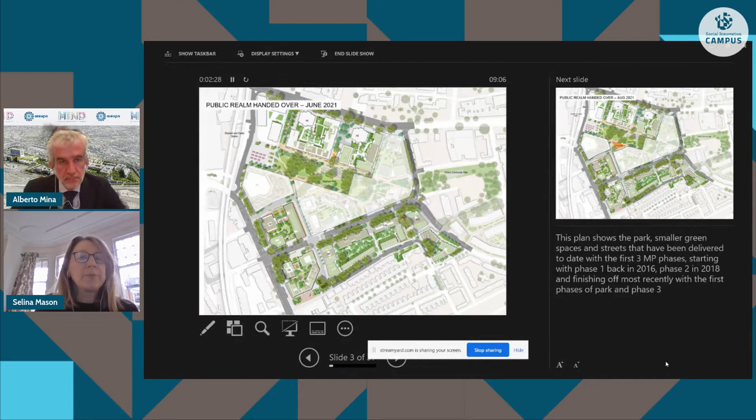We'll be finished completely. 50% of the master plan is landscape, and that was an important part of the deal with the local authority. It was very important to them that the public realm was a really central part of this park. But as you can expect, over the years it has evolved. We've been doing a lot of work to make adjustments to it and to support the park and create a place which people will enjoy, and it will support their activities in the city centre.

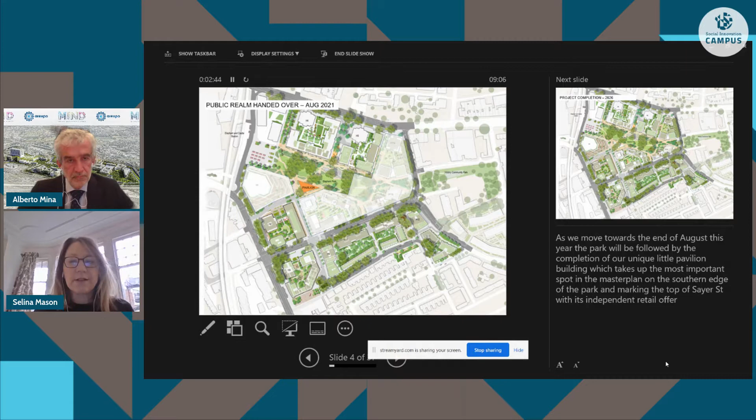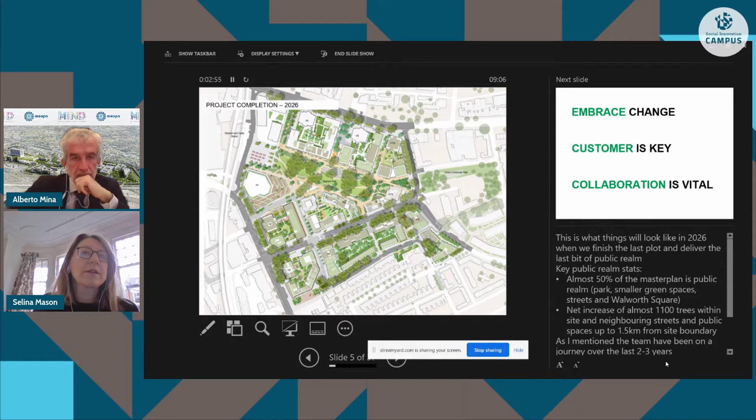So this is a pavilion, I'll show you a little bit more about that later on. And the completed park, this is the master plan that shows the completion as estimated to be 2026. So we've learned 3 things over the course of delivering this project.

Embrace change. Master plans are delivered over a long time. The market changes, customer habits change, and delivery organizations change their aspirations too. So we've learned that once your plan is in place, don't expect it to be the same forever. You really do need to make adjustments, be tuned in to what's happening, and be prepared to make changes.

We also learned that customer is key. The people that use your park, your public realm, and your buildings are the ones that really understand it best, and you need to listen to them.

And collaboration. These are complicated projects involving multiple players, agents, agencies, contractors, developers, councillors. There's a lot of people involved, and you need to collaborate effectively with them to deliver the best you can.

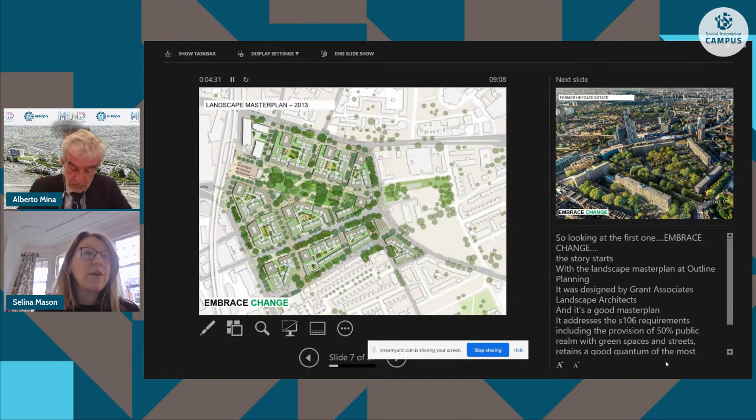If we look back at the original master plan, this is the planning consent we got in 2013, which looks very similar to the park we're now delivering. But there were some fundamental changes, and I'll go through how things have adjusted. Predominantly, our relationship with the community has changed. Their attitude towards the park has changed, and therefore the conversation with them has changed, which affected our plans and how we're building out the project.

For those who don't know, this is how it looked in 2013. You can see the site - this is the station, and up at the top there is the wheel. This is Westminster up here, Covent Garden, and the City of London further off screen. This was a piece of post-war redevelopment.

It's called the Heygate Estate. It was filled in the middle with relatively low-rise residential buildings and a wall of higher-rise buildings around the edge of the site that created impenetrable barriers across it. People who arrived at the station couldn't really get in here. You would walk down the Walworth Road or the old New Kent Road, and you didn't walk in. It was a very exclusive, difficult environment to get into, and there was a lot of social problems as a result.

So the council decided it needed to remove these buildings, regenerate the area, rehouse the residents, and rebuild a place that was much better connected, with green space at the heart of it, creating a more socially accessible, integrated, diverse community.

So this is the master plan that came. The Heygate Estate blocks were around the edge here. In the centre, what you'll notice is that the area has these mature plane trees, which the community was very dedicated to. The original master plan intended to remove those trees, but one of our first adjustments was, in response to strong community demand to keep the trees, we had to reorganize the master plan to keep as many of these big existing trees as possible.

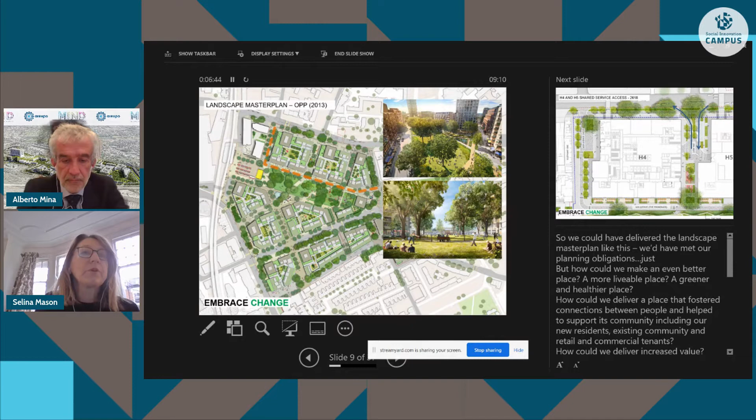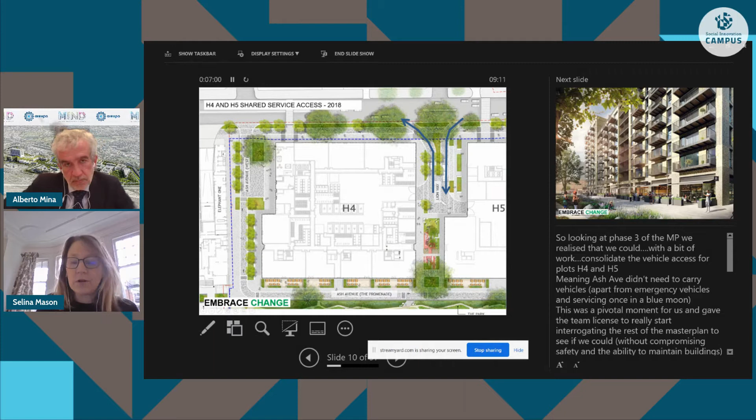One of the other things we did - this plan showed a street here for cars and vehicles to access. That was one of the early changes. By thinking carefully about how these two buildings were serviced, we could avoid cars going onto this street next to the park, because we wanted to deliver a better environment for people, less traffic, better air quality, and a better relationship between the buildings and the park. The idea of removing cars from the master plan was an important part of how we adjusted our thinking.

So we managed to get these cars off here. A lot of difficult conversations to make that happen - it was not easy. We could easily have given up, but we decided you have to follow your instincts. If they're telling you to create better connections between the park and the buildings, you have to have those difficult conversations, you have to make it happen. So we eventually managed to persuade all parties that was the right thing to do.

This was an early CGI of what that might look like, but you can see it's still quite hard landscaped. It doesn't feel particularly connected to the park - there's still remnants of a sense of cars being able to journey along there. So we pushed harder, saying actually the character of this place is about the park.

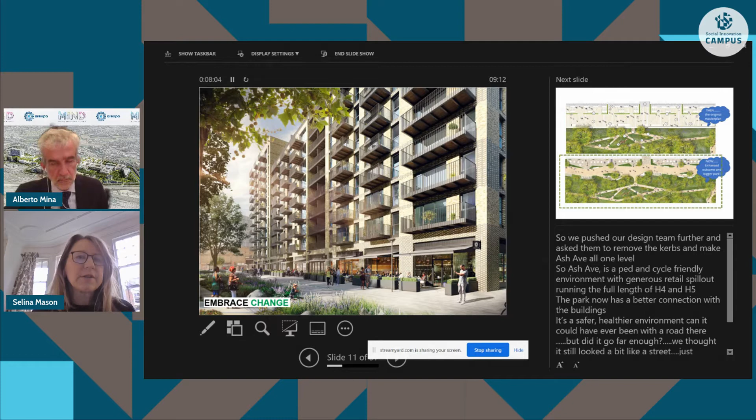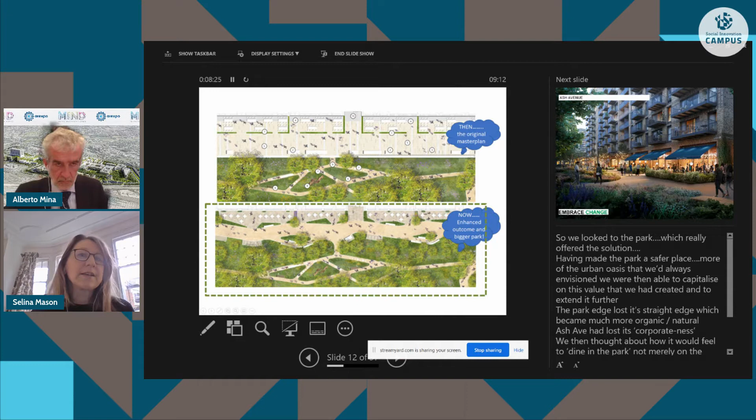We really do need to get the park to meet the buildings and create something that feels more park-like along this street. So we pushed the designers to change their thinking from a very hard, fierce edge to the park to something more relaxed, bringing green space and biodiversity up against the buildings, creating something that feels more like a park promenade than a street next to a park. This is now the latest CGI of this.

Actually, we've built a lot of this out. This summer I expect we'll be seeing retailers coming into these spaces beneath the buildings. This is a west-facing edge, so the sun will be shining in here in London over the summertime, and we expect this to be a very active and exciting place to be.

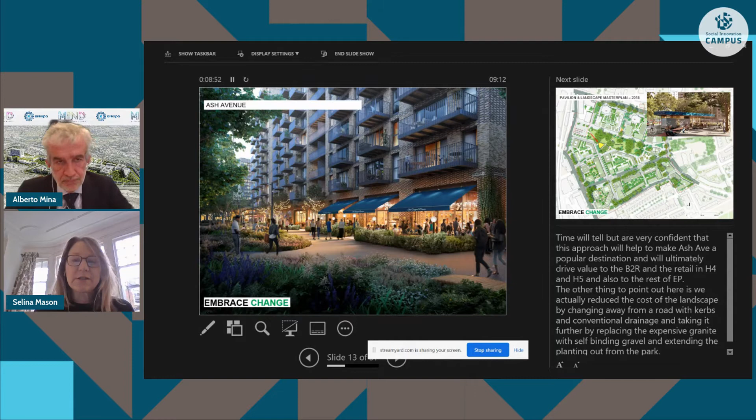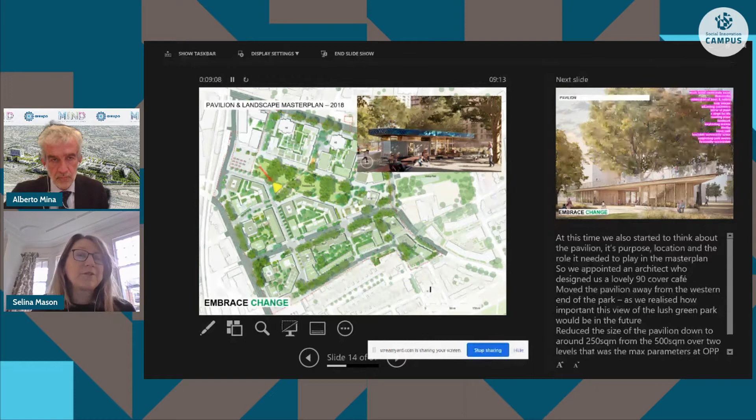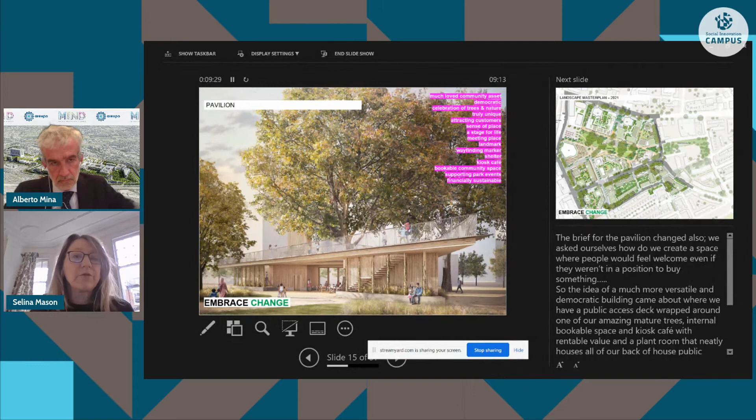We've also made changes to things like the pavilion. This was a little cafe. We thought, hang on a minute, a lot of the community here need places to hang out where they don't have to pay £3-4 for a cup of coffee. How about creating a pavilion that's all about the community, somewhere people can gather together. This is about a community hub, not actually about paying money. We're building it around one of the existing trees, again to reinforce the idea of people coming together in the park and really enjoying those mature trees in the center. So that's another change we made.

We also introduced commercial space. H1 here is going to be an office, again thinking carefully about creating a place that's vibrant throughout the day. With office workers there, as well as a lot of residents, you get activity throughout the day, which is an important part of creating a strong, regenerated part of London where there's a lot of activity.

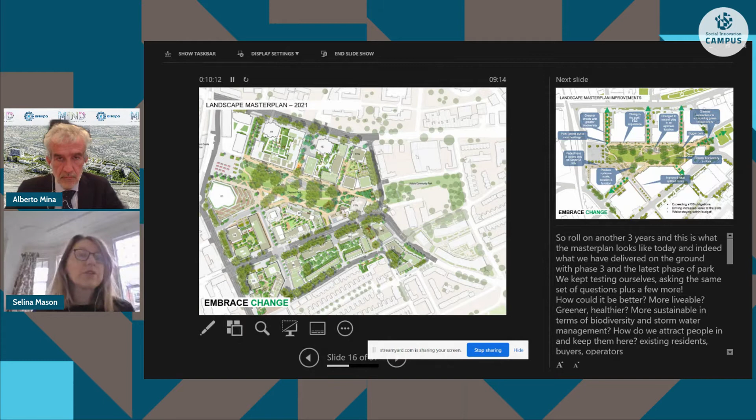And people feel safe throughout the day, because a lot of the issues we were dealing with very early on were about personal safety. So that's one of the conversations we've repeatedly had with the community—how do you create places that are safe and feel comfortable.

So this is all around some ideas about how that's going to work. I know I've got to quickly get through all this—some images here of how this is starting to come together and look.

We've been working very closely, as I said, with the community, often talking to them. Last summer, or two summers ago, we had a conversation with them about the park. They wanted it to be much more open and something they could be proud of, something that other people in London would come to. So we started to talk to them about a play space.

This is the play space. It's full of Italian porphyry—a physical connection with our country. Yes, we worked really hard with the porphyry quarry in Italy, because this is for children, so we needed to work closely with the quarry to get the right kind of stone and the right shapes to make it safe. We worked really hard on this.

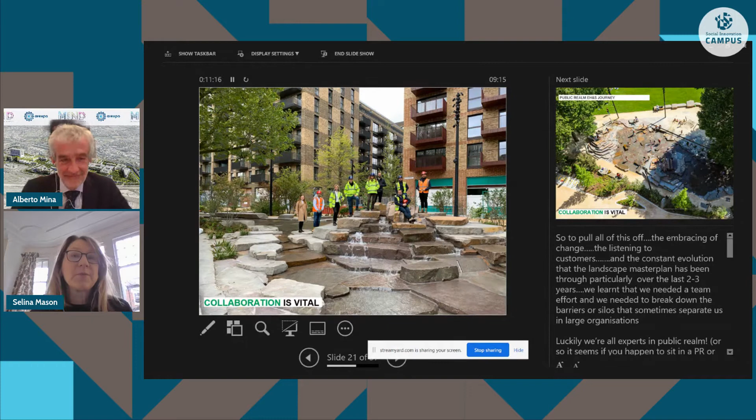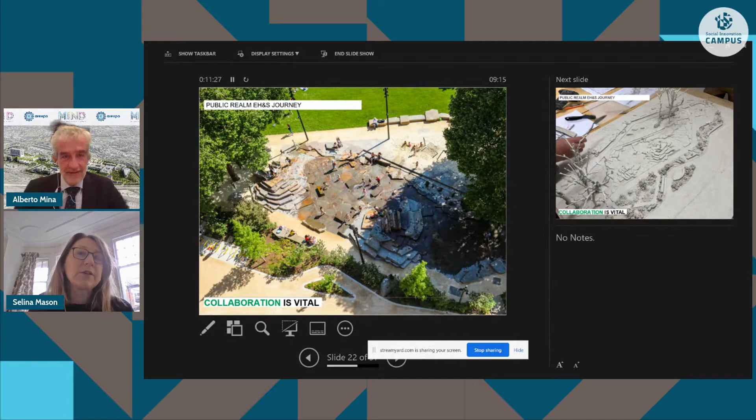This is the completed project from last summer. It was a huge success, and is really drawing people to the park from way beyond the immediate community. A lot of the people using it are local children, so from a place they were excluded from, this is really a central part of the local community now.

So we worked closely with the designer on this, and with a safety organization to make sure it was going to be safe for the community. Those are the final comments there. So that was really about embracing change, making it an open place, listening to people, and collaborating to get that delivered. Here's the latest image of the park.

I'll just take you through quickly some of the latest images. Biodiversity is also an important part—not just people, but biodiversity as well.

Okay, so thank you, Selina. Really fascinating, it's impressive. It has also, particularly from your words, emerged like it's a process—this kind of design is a challenging process. But I think we can come back to this point in the question time.

So now let's move to Moscow, to Ottavia Franzini, who is project director at Land Italia. And she will illustrate the Rublyovo-Arkhangelskoye Smart City Park—I hope that I pronounced the name correctly. Please, the floor is yours.

Hello, hi, thank you. I hope you can see my screen. I'm going to talk to you about a very special project that we're involved in in Moscow, and I'm proud to say we've been involved for a very long time, since 2013, when we won the competition for the urban master plan of this very large area of almost 460 hectares.

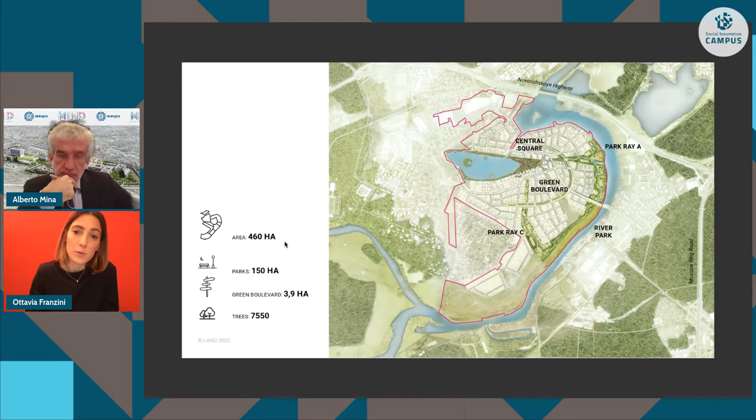But as you can see, the landscape areas, the parks, the boulevards, and the public realm in general occupy a very large portion of it. The parks cover almost 150 hectares. We are now developing a green boulevard that connects and frames the center of the city, and so far we've been able to implement in the design almost 7,500 trees, just to give you some numbers.

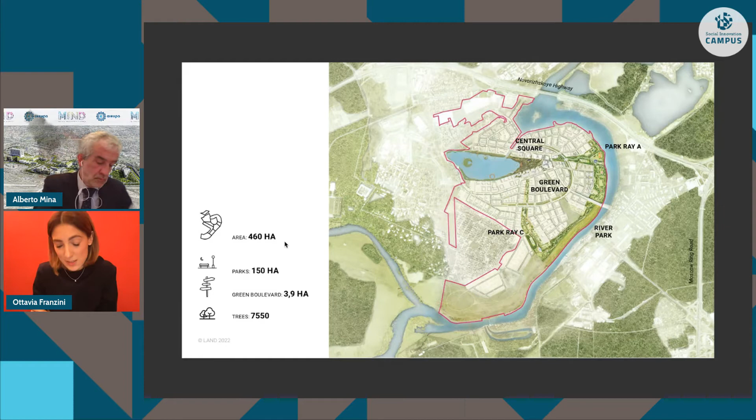These are the design pillars that guided the design phase from the very first moment: the idea that landscape should come first in terms of importance, in terms of extension, but also in terms of implementation during the construction phase. Since we are working along the river, the approach to the design should start from there. And since the goal is to develop a smart city, the urban landscape should approach the design on the same side, becoming a smart urban landscape.

When I said that landscape is structuring, shaping the new city from the very beginning, you can see here from the very early sketch of the master plan that the green and blue infrastructure, the water bodies together with the green areas, are deeply rooted into the layout of the city. So they become design pillars, connecting the river and the river park along it to the very center of the city. The river becomes the backbone of the structure, and the green and blue infrastructure extend into the inner part of this new community.

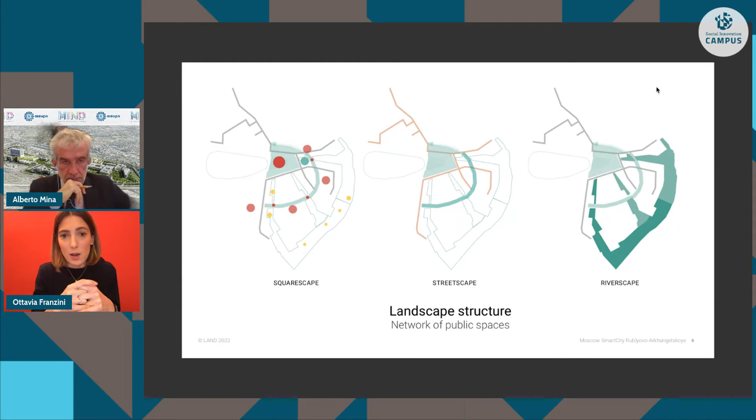We are giving space to a lot of public spaces, art areas, and functional areas for the kids and in general for the community to enjoy. And of course, the structure is given by the parks and the river park itself.

Talking about approach and green infrastructure, we consider the implementation of nature-based solutions that we wanted to include both during the urban development, in terms of large infrastructure, but also in dialogue with the architects in order to implement them in the buildings.

The concept itself behind the parks is to bring back and connect to the Russian urban forests. So the idea of urban forestry, the extension of green spaces, is deeply rooted in the concept. It's nothing completely new. And the idea that the NBS could include a lot of benefits was part of the dialogue with the client, and it was debated at length—the benefits, also economical benefits, that these NBS can bring to the city in the long term.

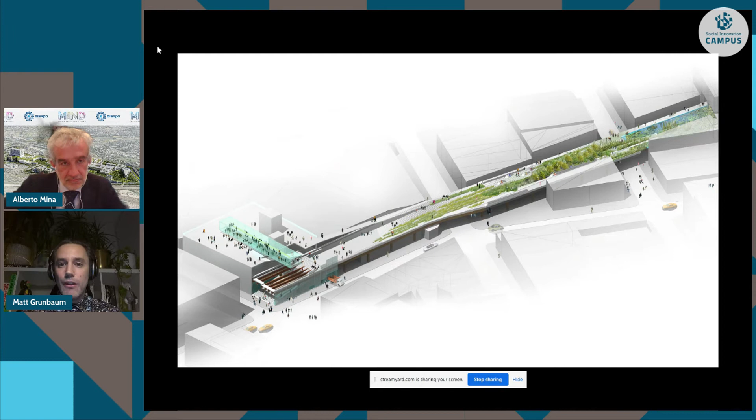We did a number of community outreach presentations where we would show iterations of the design. The community would come and be able to write down or voice their opinions on things, and we were able to take those comments away and integrate them into the design, changing the form throughout the whole design process.

We even did smaller scale community outreach where we would take small groups up to the High Line to get them excited about the project. This rail line sits 30 feet in the air, so the only people who could really see what it was up there were people in the adjacent apartment buildings. It was really exciting to bring various community and neighborhood groups up to the High Line to get them excited about what was actually going on up there.

We did other small events like seed collecting of the wildflowers up on the High Line, small building events with kids from local neighborhoods, and even block parties, bringing in awareness, getting excitement, and allowing a variety of community groups to comment and have their input on the design process.